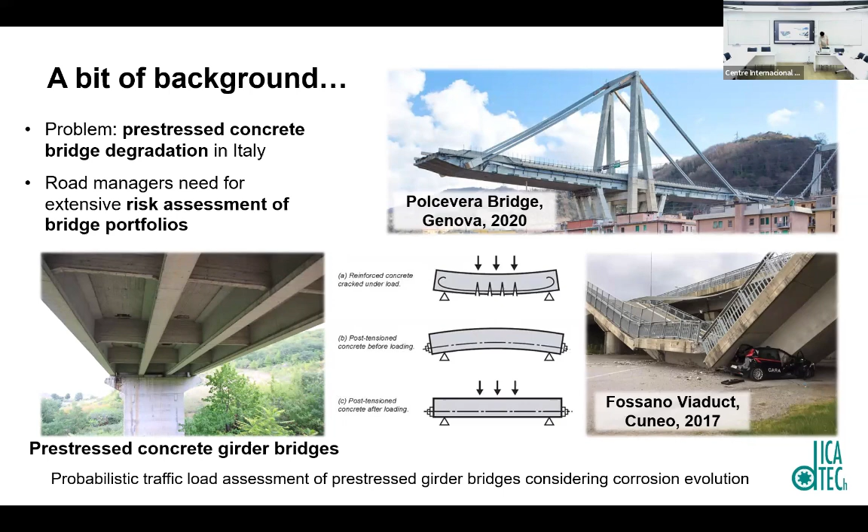So it's clear, the prestressing technique, is it clear for you? Yeah, so I can go on. So we have this problem.

Let's think maybe we can suppose to be one of these infrastructure network managers. I think we would not be happy to be one of them, because they're facing a very big problem in Italy. They have hundreds, thousands of structures to assess, and it's not so easy. It's impossible to have a detailed assessment of all of these structures. We don't have the human resources, we don't have the time, and we don't have enough money to do that.

For example, if you think about having, like, next week, lots of things to do, and you are sure you will not be able to fulfill all of them, maybe the best thing you can do is establish some priorities, do your priorities first, and then go for the secondary things to do. This is actually one of the best techniques also for this kind of very large assessment. You can establish priorities first, and then focus your money and your resources just on those ones with a detailed assessment, for example.

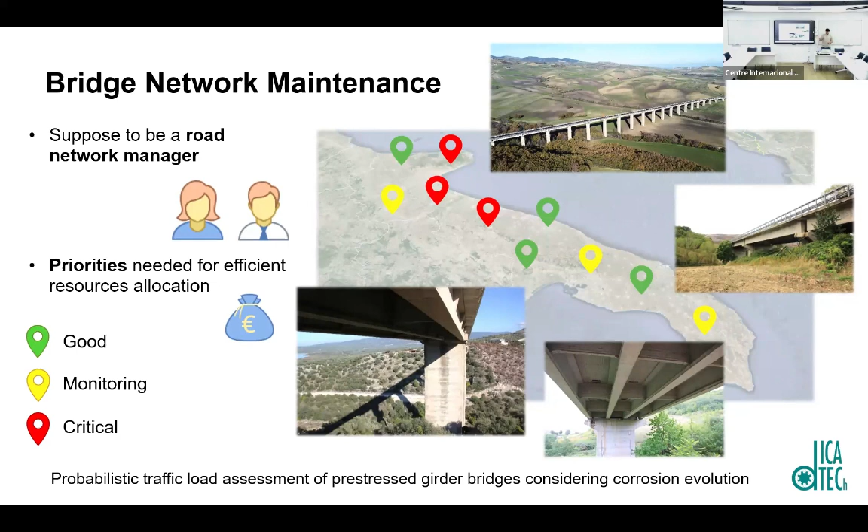So you need a process to optimize your allocation of resources. How to identify priorities? We are studying that in Bari now, a procedure to do that. And this procedure needs to have three characteristics basically: it has to be automated, simple, and efficient. Those three ones.

Why simple? Because you are dealing with thousands of analyses. So when you're dealing with this big amount of analysis, you need it to be simple and very fast in terms of computational cost. Actually, what you want to do is avoid finite element analysis for this kind of assessment. You want your analysis also to be automated for the same reason, because you have a very big amount of analysis to do.

But when you gain in simplicity for your analysis, maybe you can lose precision. So you need this analysis to be efficient. You need these outcomes to be meaningful, and also user-friendly, because the outcomes of this analysis need to be used by managers, who maybe are not engineers or scientists. So you need this to be simple, efficient, and automated.

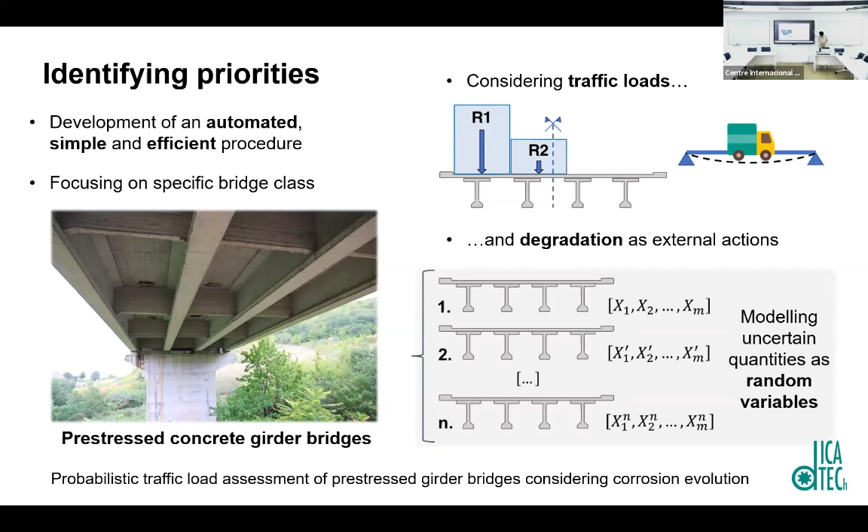I'm not going into the details of the analysis because we don't have the time, but just to give you two highlights. The first one is the main novelty of the analysis, which is the corrosion modeling here. What's corrosion? Actually, corrosion acts on steel tendons, which are inside the beam. So it acts on steel. And what does it do? It literally eats the external part of the steel.

So you cannot account for the entire cross-section area of your steel rebar, but you have to reduce it when you have corrosion. So we are dealing with the corrosion modeling using steel tendon area percentage reduction. And as this percentage reduction increases, you have to also modify the mechanical characteristics of your steel. In this case, we are focusing just on the corrosion of the steel.

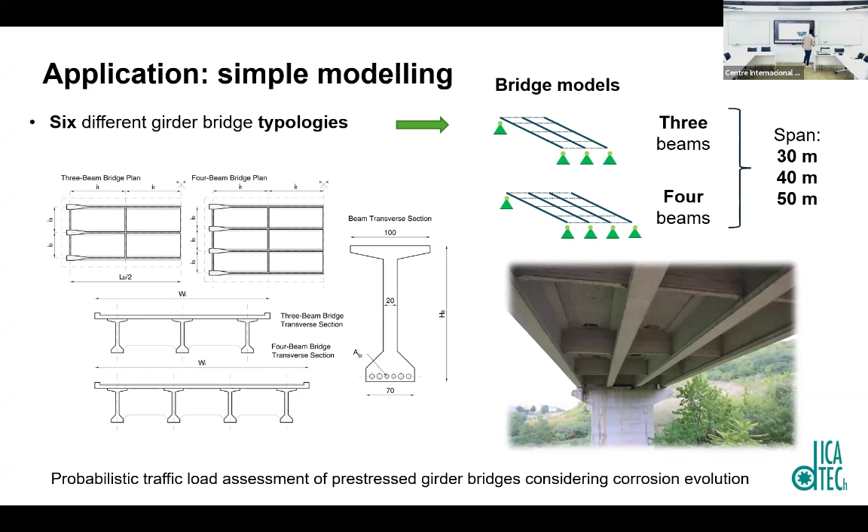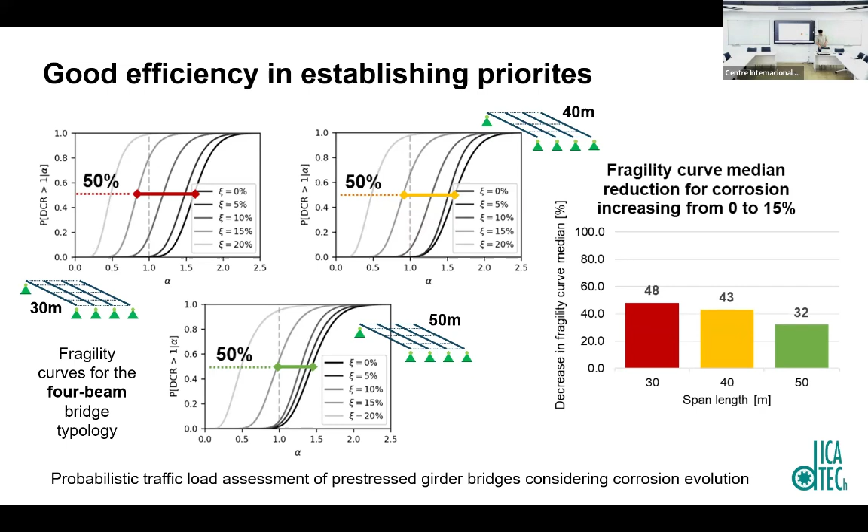Is it clear? Is it good? Yeah, so this is, I think, the last slide on results.

So we can do some prioritization among different typologies of bridges with this procedure. But if you look better at the results, we can do something else, which is also interesting. We are able to compute fragility curves with this procedure, but not considering both shear and flexure failure mode together, but taking them one by one. So we are just considering flexural failure mode, and we can compute the fragility curve just for flexural failure mode, and also the fragility curve just for shear failure mode.

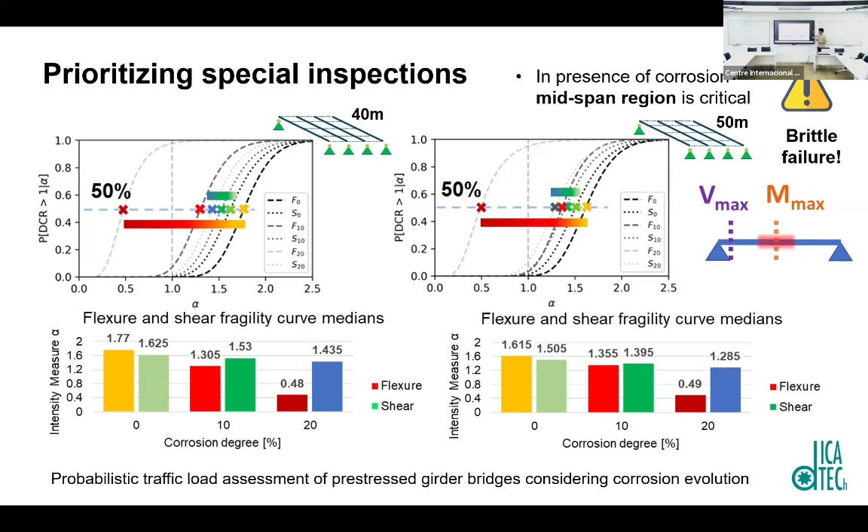So I think that's it for the results part, and we can conclude with some concluding remarks, because I want you to have in mind just 2-3 general ideas about this work we are doing at our Polytechnic University in Bari. We are trying to develop an automated, simple and efficient procedure for this kind of portfolio scale bridge analysis, so a very, very big analysis.

The aim is to establish priorities, in this case for optimization of resources. We are studying now this bridge class: simply supported, girder-type, post-tension, prestressed concrete bridges, which are the bridges I showed you before during the presentation. This is because it's one of the most widespread typologies we have in Italy, but this kind of procedure can be extended also to other typologies of bridges.

The main outcomes are that corrosion for these kinds of bridges is very, very dangerous, and that this procedure has to be improved. As I told you before, I'm working on improving it with finite element modeling to validate it, stuff like that. But it can be helpful in prioritizing among different bridge typologies, and also interestingly in prioritizing special inspections. Well, I'm done.

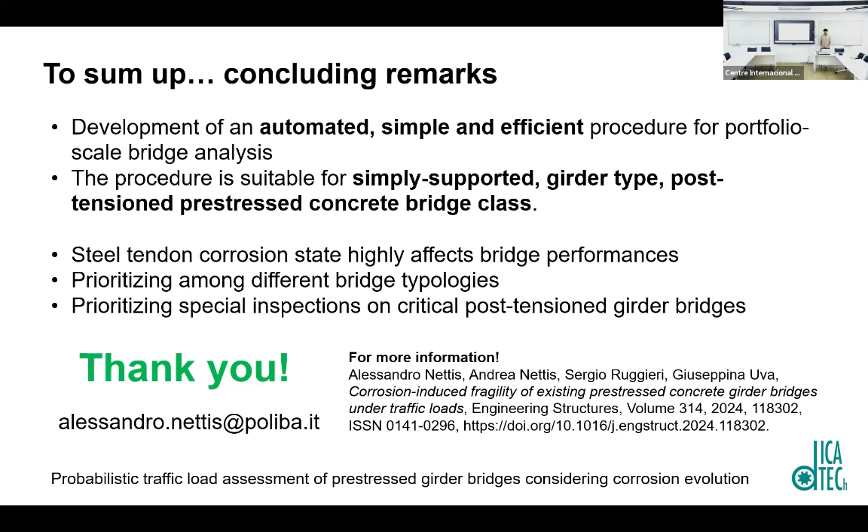You compare it to when it breaks, and you have a sample size, and when it breaks, that's the probability for that one. I can show you. I didn't report so much detail about that, so maybe this is not so clear.

You have different realizations of your bridge typology. By changing the mechanical properties and geometric properties, you can generate a sample. In this case, there are 350 different realizations for one typology. So typology is, let's say, span and number of beams — for example, a structure with 30 meters span length and 4 beams.

Okay, let's think about that. You have 350 different realizations of this structure. What is a realization? It's just a model, let's say.

For example, your concrete strength for that kind of structure can be 30, 35, or 40 megapascals. So you have 3 different possible values for your concrete strength, and you can generate 3 different realizations of the same structure by changing these characteristics — 3 different models of that.

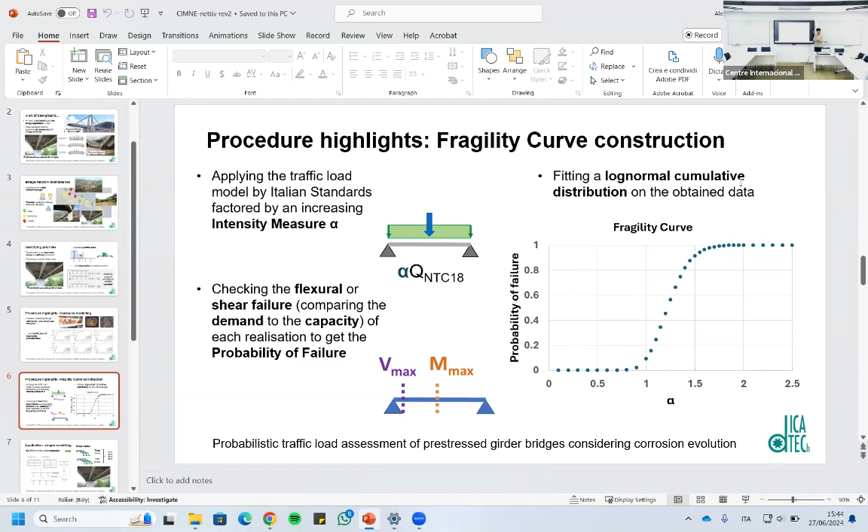Can I ask about the material model that you commented on before? Yeah, this one. It seems to me that mainly the effect of the corrosion is that it increases the brittleness of the material.

Yeah, exactly. So you also commented, and you have written the area reduction—where is this intervening? The reduction in the area of the tendon, in the algorithm for computing the capacity. I didn't put them here, both for the flexure and for the shear. The shear is a very simple formula, and the corrosion is acting for shear just on the mean state of compression of the beam—that's the only thing that counts for the shear failure. So if you have the reduction of the steel tendon, you have the corresponding loss of mean compression, and that's the only thing affecting the shear.

While for the flexural bending moment it's more complicated. We have an entire algorithm for that written in Python, and it's all based on the translational equilibrium of forces acting in a cross section of the beam. So you have the compression in concrete and the tension in the tendons, and if you have a reduction of the area and of the characteristics of the tendon, your resultant force in tension has to be modified by those characteristics due to corrosion.